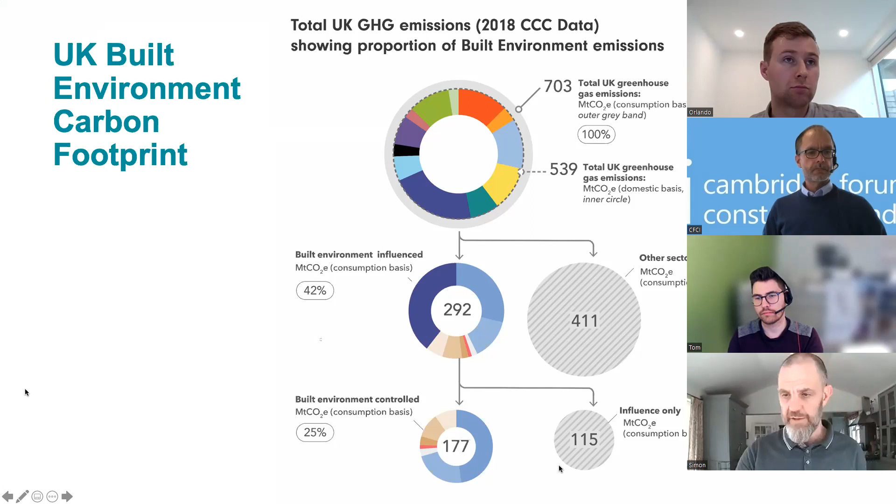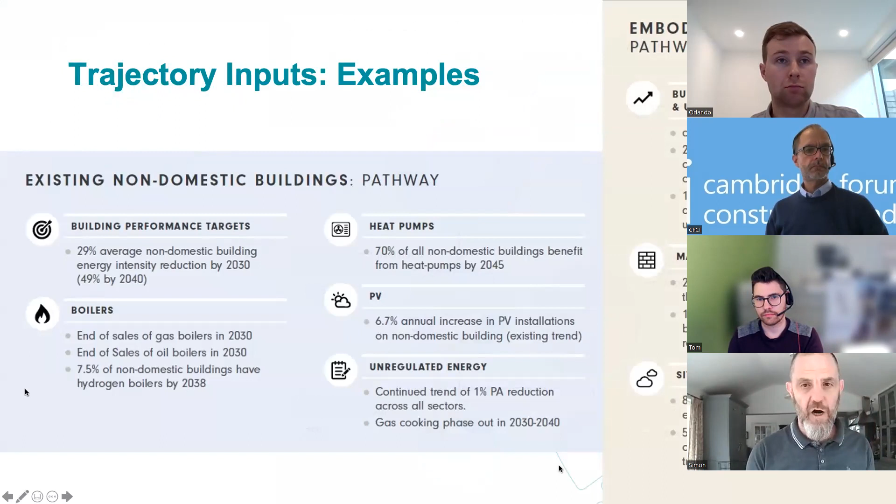So then to determine at that point, what we had was the baseline, the carbon footprint impact of the built environment. And what we were trying to do with the roadmap is say, to get to net zero 2050, we need to make massive shifts across all of our primary areas. So we broke things down into existing housing, existing commercial buildings, new buildings, and infrastructure - those are the four main groupings.

So then to determine the carbon budgets, once we had that carbon footprint and scope of emissions, we were able to say, what are the things that need to be done to get us there? So for instance, if you look at existing non-domestic buildings, 70% of them have to have heat pumps by 2045. We have to end the sale of gas boilers and oil boilers by 2030. 7.5% of non-domestic buildings have to have hydrogen boilers in the late 2030s.

Now, the reason these are all significant for us is, getting this clarity at a really granular level for each different building type means when government puts regulation out to consultation at the minute, I can cross-compare that to what the roadmap shows, and we can indicate whether we think it's going far enough, fast enough. It gives us an understanding of how quickly skills and supply chains across the market need to get into play to get us to the right places.

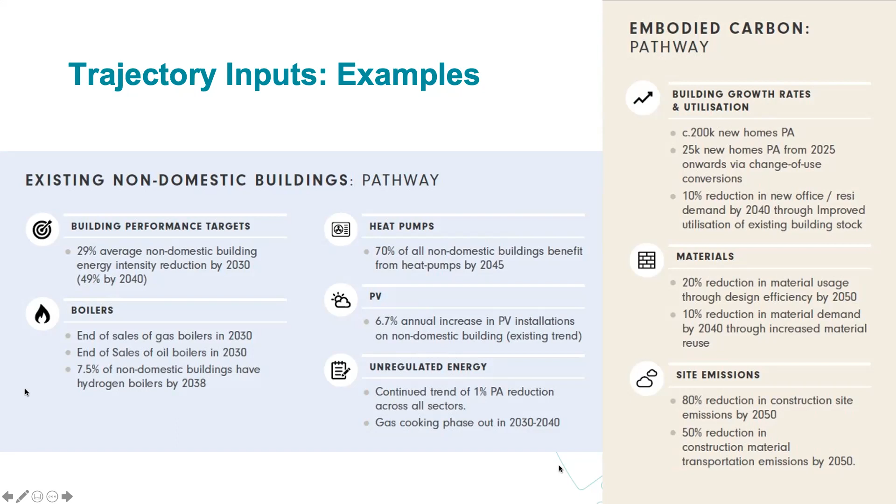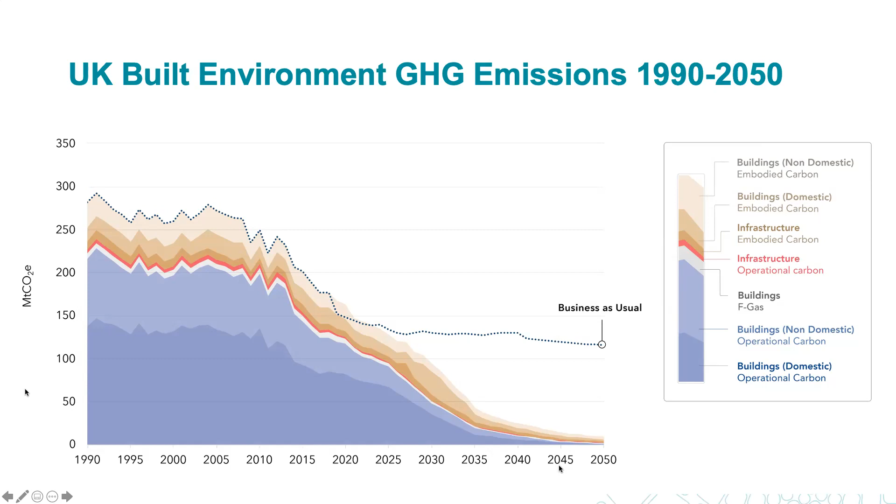And what I'm going to do next is go into the 5 key recommendation areas and just highlight a few different bits of detail as to what needs to be done on this. But again, in the report, we've tried to be really precise about indicating exactly what has to happen and when across each area. So we've got loads of information in there about what are the key milestones, what are the key policy interventions needed and when.

It's been a tumultuous but very positive six months engaging right across UK government and all the major departments with the roadmap, understanding and talking to them about what that means—from BEIS and DLUHC before and after Christmas, right through to Treasury last week, along with all the officials and a wide range of energy providers in that meeting.

So onto the 5 key priorities. At a summary level, we have an incoherent approach to how we're going to decarbonize the existing housing stock—that's the big chunky blue area at the bottom of the roadmap graphic. On non-domestic buildings, we're miles off understanding the performance of those buildings, so we need baby steps around enhancing the amount of energy performance that has to be visible, disclosed and reported. And for new buildings, one key output is moving away from designing based on a notional energy approach rather than designing for actual energy use.

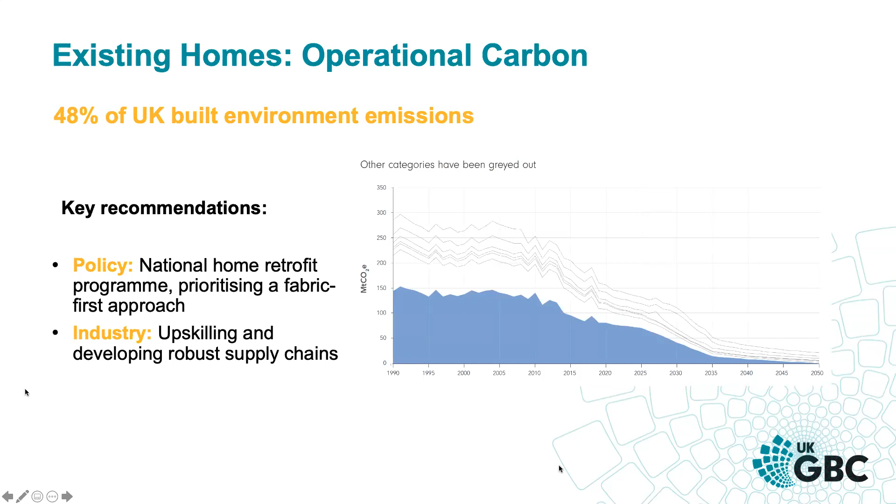Just to reflect quickly, that dark blue area highlighted shows the trajectory needed from the national retrofit of homes. It's pretty robust that ceasing the sale of gas boilers and that massive uptick in installation of heat pumps—there's a moment in time around 2030 that if we don't get right, we then can't hit the 2050 targets, whatever is done everywhere else. So there are some really big seismic opportunities and risks in here.

In terms of non-domestic buildings, what we need is for everything from the valuation to the use of non-domestic buildings to reflect energy use in that decision-making process—making sure real world performance is visible in the market, that it becomes a factor in asset valuation, market transactions, and ensuring we're engaging much better with occupiers as well as landlords in that process.

So what we need is a performance-based rating system to come in to help drive that. Again, like housing, we need a cut-off date for existing commercial buildings—after 2030, no more gas. We need to keep ramping up the minimum energy efficiency standards as they apply to existing commercial buildings, and we need to get rid of VAT on energy efficiency retrofit works.

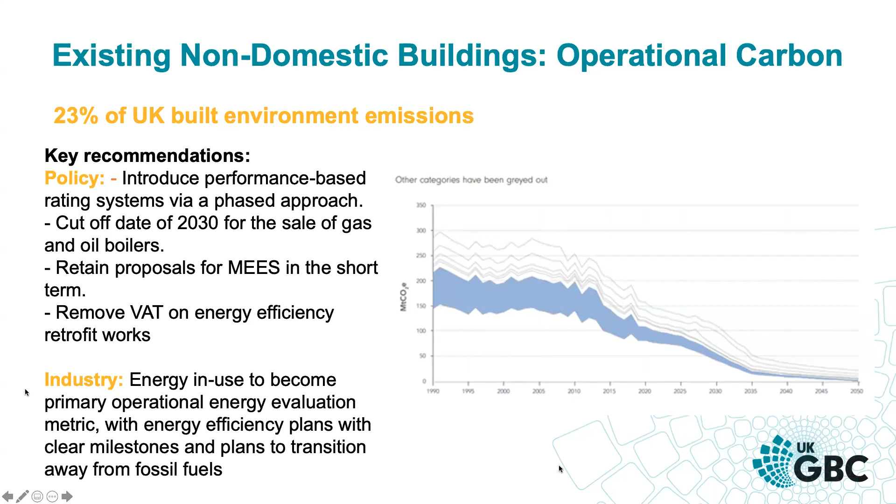That's also one of the policy recommendations in existing housing, as is the requirement to flex stamp duty so that you get variable stamp duty based on the energy performance of a building—so that at point of transaction, we are encouraging people to, A, consider energy performance, and B, address it if that's going to have a financial boon when it comes to calculating stamp duty levels.

Then in terms of new buildings, just a tiny bit more detail. Everyone will be aware that at the moment we use a notional building approach. So our building regs and our EPCs don't really relate to how a particular building is actually performing in terms of the energy it uses.

So we need to move to an actual performance approach to energy use and set a really clear and coherent timeline for industry so they can skill up and scale up to get ready for the higher performance standards that are coming. We've got the future homes standard and future buildings standard interim targets this year, and then we're looking at setting what the standards will be for 2025 onwards. There's a real moment in time here to show the net zero ambition that's going to be necessary, and make sure we're doing that on an actual energy use basis.

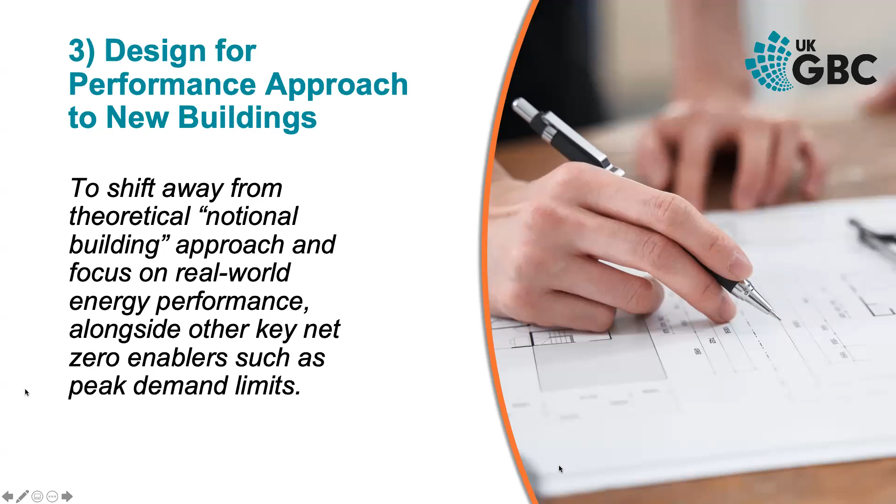There's a real life cycle issue around how we embed that actual energy use into the process. It can't just be something that happens at the design stage or construction stage on a technical basis. It has to be right back at the start when we're thinking about contracting and procurement, and at the back end when we're thinking about management - what is the actual energy performance of that building? Part of that is about technology and design, and part of that is about knowledge transfer and efficient management, and an understanding of energy behaviour across a much wider group of professionals across the industry.

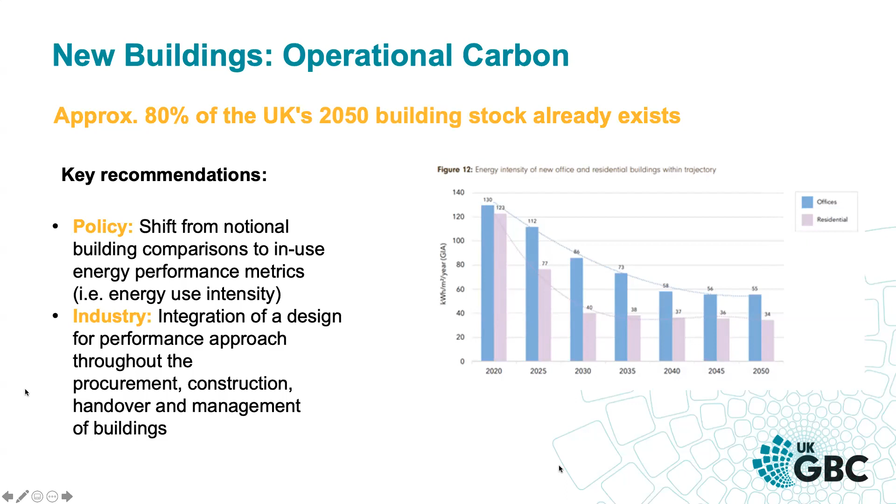In terms of embodied carbon, it currently makes up 20% of built environment emissions. The trajectory shows that as we improve the operational performance of buildings, the relative size of the impact of embodied carbon increases as operational emissions go down. 2035 is the tipping point when operational emissions have fallen to the extent that embodied carbon emissions become the bigger of the two. But at the minute, embodied carbon is currently completely unregulated.

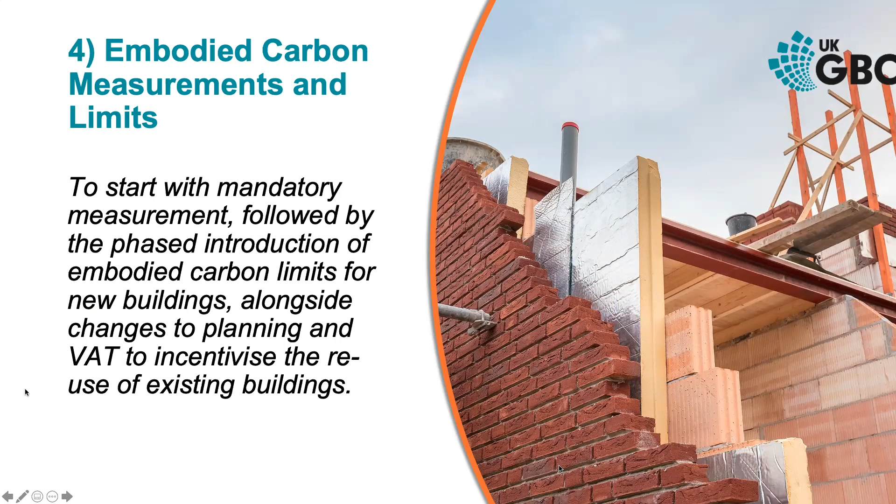Measurement of embodied carbon, and mitigation of the amount of embodied carbon, is entirely voluntary within the construction sector. So the roadmap is calling for legislation to be introduced quickly, initially requiring just the measurement of whole life carbon on projects over a certain size. That's to try and be realistic and recognise where the industry's at in terms of an agreed benchmark and an understanding of different product standards. Then after that initial measurement, we're looking at following up with the introduction of embodied carbon limits on a ratcheting basis.

I won't dwell on the detail here, but we've spent several decades working through different approaches and policies and industry movements to address operational carbon. It's time that we take that same level of strategic thinking to the embodied carbon problem.

We are seeing certain signs of embodied carbon rising up the agenda, with the November refusal of the Tulip development project in London - the Foster-designed tower - where embodied carbon was given as one of the two reasons for its rejection. And there's the percolating issue of the M&S building in London at the moment as well, with embodied carbon sitting as a big concern within that.

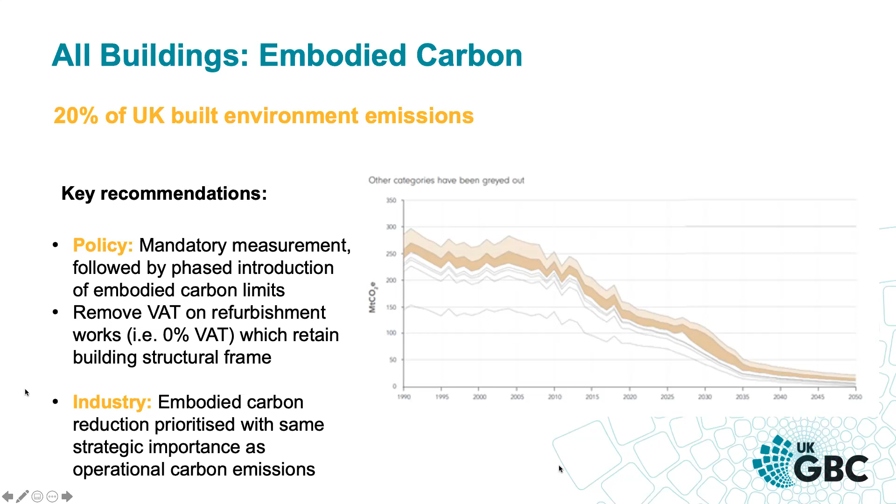It's worth saying a word on embodied carbon. I won't dwell on the detail, but for anyone interested, when I send the information and links, we've analysed and set out when we think regulation - A, of measuring embodied carbon, and B, of reducing the amount of allowable embodied carbon - should come in for different building types. That's partly because bigger buildings built by bigger companies can seed the knowledge quicker into their activities.

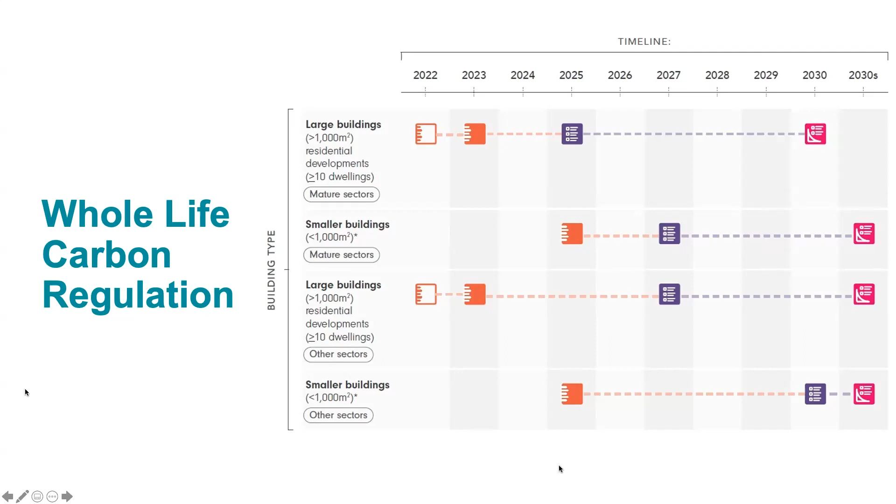The smaller buildings are much more challenging to get this new layer of knowledge into. At a basic level, the orange outline at the front end is mandatory measurement communicated that it's going to happen. The solid orange boxes are when mandatory measurement of embodied carbon and disclosure comes into force. The purple boxes show when minimum standards begin to kick in, where the trajectory of ratcheting begins, and the pink is the progressive tightening that happens after that. So when we look at government policy proposals or consultations, we can see how they perform against what we've got there.

I've kept infrastructure light on this, but even more so - we moan a lot that government don't have a coherent plan for housing retrofit, and we don't have an agreed strategy around how to address the decarbonisation of our existing commercial stock. But actually, maybe more than anything, what we need for a net zero infrastructure approach is real systems thinking.

When we're looking at the scale of the projects and their sizes, that balance between performance, a whole wider range of societal impacts, embodied carbon, integration with surface transport, integration with the energy infrastructure - we really just need a complete shift in mindset when it comes to infrastructure if we're going to reduce those emissions.

What we can't get to is zero in this area, because of supply chain issues around the embodied carbon impact. So it's one of the areas where at the very back end of 2050, there's a small residual amount of built environment emissions that we will probably still need to offset, through a combination of land use change and some sort of greenhouse gas capture technologies. For anyone familiar with the regulatory approaches, these will probably need to be implemented across all projects as one of the many steps to take on this.

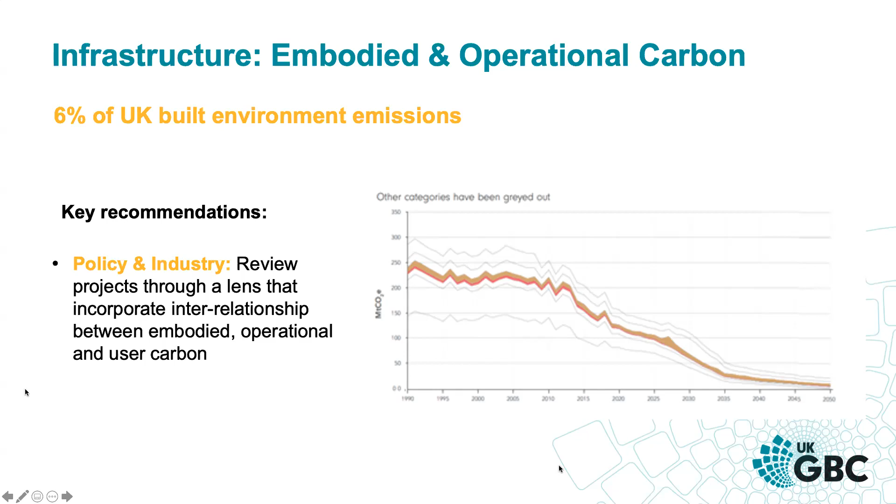In terms of where next for UKGBC - we've got a massive programme of engagement, both in Whitehall, up in Scotland, and with various combined and local authorities around the roadmap and what it means. In fact, we're in discussion up in Scotland about whether we do a Scottish-specific one, because they've got a 2045 target, and there's a keenness for us to remodel for that.

What we will be doing with Arup and other partners is looking at rolling updates for the underlying data, and then slightly longer range rolling updates about progress against that. So making sure we can always understand where the baseline is on a yearly or two-yearly basis. Then maybe on a three-yearly basis we can cast forward and say which policies have come into play, what industry actions have been taken, and how that recalibrates what we need to do moving forward.

I think I've overrun by a couple of minutes, so apologies for that, but that's me.

Great. So why embodied carbon? What is embodied carbon, and how can we address it?

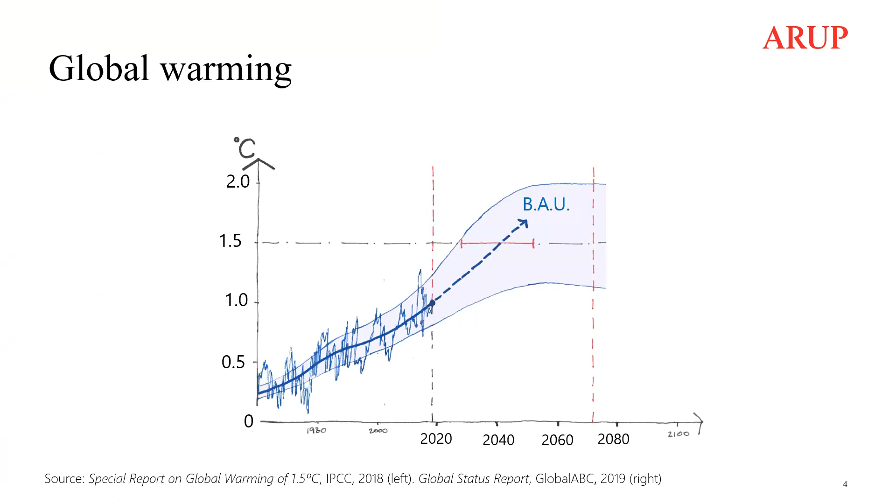I'm sure lots of you in the room know, but if we keep going on as business as usual, we will surpass 1.5 degrees in around the 2040s, according to the latest IPCC report. The consequences of doing that are pretty horrendous. If we go anywhere above 1.5 to 2 degrees C warming, it has huge consequences for life on the planet, both ecosystems and human communities.

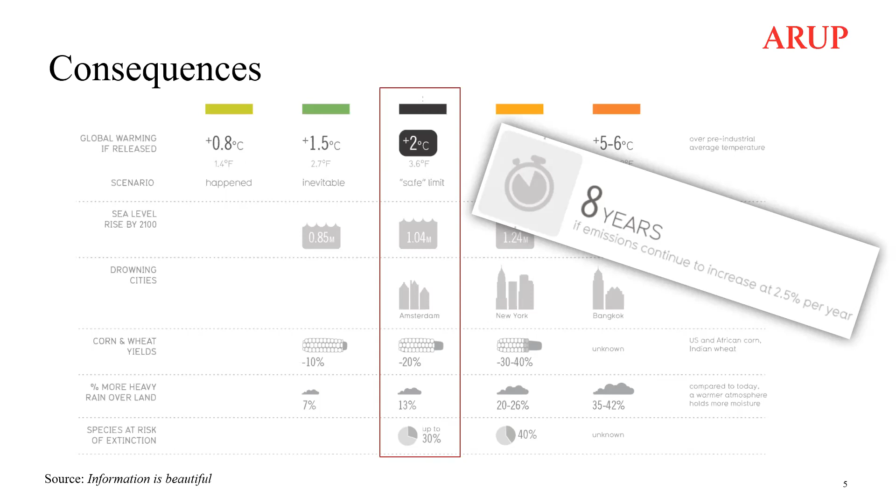This is just a graphic that I love from Information is Beautiful. I think it really hammers home the point of just how widespread the impacts of surpassing these targets are.

In terms of global emissions, I think Simon already said the UK values, but globally, embodied carbon of construction materials accounts for 10% of global emissions. That's more than aviation and shipping combined. So we have a huge impact.

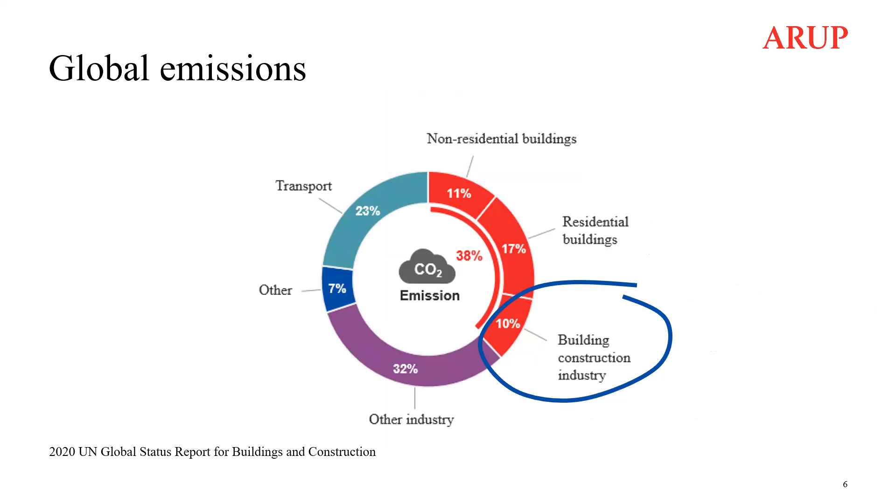We know that we need to minimize emissions, and to do that, rapid, far-reaching and unprecedented changes are required. So we have a lot of work to do on embodied carbon, which until very recently has not been discussed nearly enough.

Just to give you a quick idea of how much impact you can have as a built environment professional on global emissions through your professional work compared to your personal lives - we often think of reducing the amount that we're flying, going vegan, or cutting down on our car driving. That's fantastic stuff, and we all need to do that. But we also have the privilege of a huge opportunity to make even bigger, two orders of magnitude larger carbon reductions through our work.

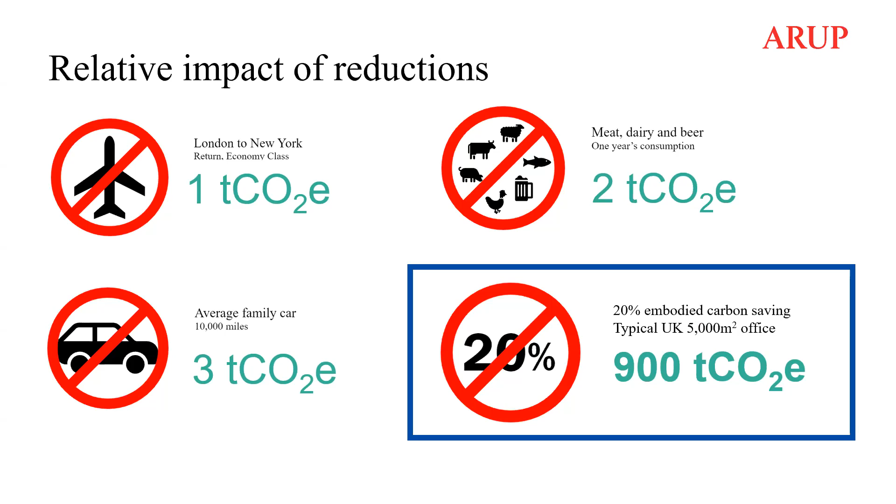In this example, if we just reduce the embodied carbon of a typical office by 20%, we can save 900 tons of CO2.

Thankfully, the industry is moving forward. There are signs, and I've just picked out one particular lever for change, which is policy, because I think it's a particularly important one. Of course, every single stakeholder in the built environment needs to act, and the UKGBC roadmap has really clear guidelines for what each stakeholder group should do.

But my sense, at least, is that lots of people, especially in the design community where I'm from, have lots of willingness to make change. And I think once the policy lock is taken off, then the industry could really accelerate towards net zero.

So just an example, in London, we have the London Plan, and as of last year or maybe the year before, there is a policy that requires a carbon assessment at the pre-planning stage and also at the post-completion stage, so that design teams are forced to actually think about how they're going to reduce carbon and what they're going to do, which is fantastic.

Again, Simon mentioned policy in the UK, and I'm really pleased that fantastic people like Will Arnold at the IStructE, Tim den Dekker, Julie Godefroy, and others have come together and pitched this Part Z new carbon regulation to the UK government, which would require carbon assessments in all projects, and then after it's been in place for a few years and data has been collected, it would set carbon targets to be adhered to. So that is really promising - I very much hope that goes through Parliament really quickly.

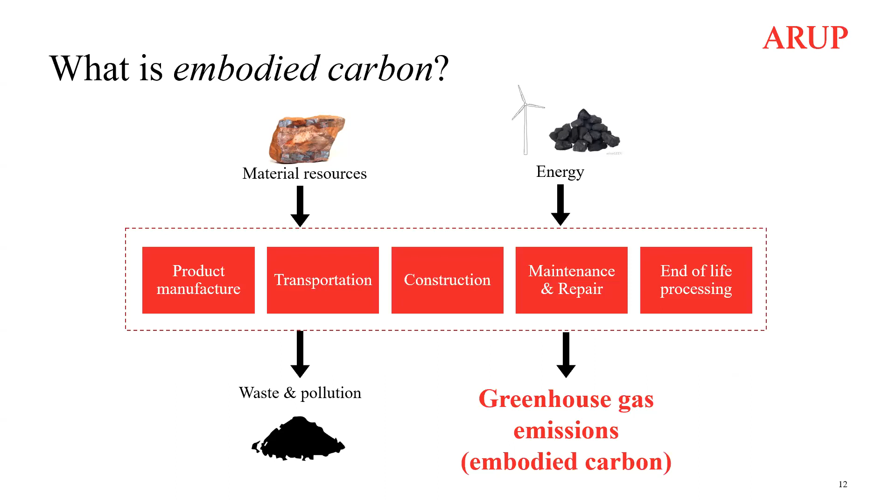So what is embodied carbon? Taking a step back, over the life cycle of a project, we manufacture products, transport them, construct them, maintain and repair them during the life cycle of a building or asset, and then they're processed at their end of life. Into that goes a whole load of materials and energy, and out comes waste, pollution and greenhouse gas emissions. That's what we refer to as embodied carbon.

This is a diagram of the life cycle, showing the life cycle stages of a building. If you're not familiar with it already, I really recommend you familiarize yourself with these modules from A to D, because that's how whole life carbon is referred to in practice. Everything in pink is embodied carbon, so we have the manufacturing, construction, in use and end of life stages. The yellow is operational carbon, and on the right-hand side we have this circular economy module, which allows you to quantify the benefits or loads of using those materials from your building in a certain way after their end of life. Embodied and operational together make whole life carbon.

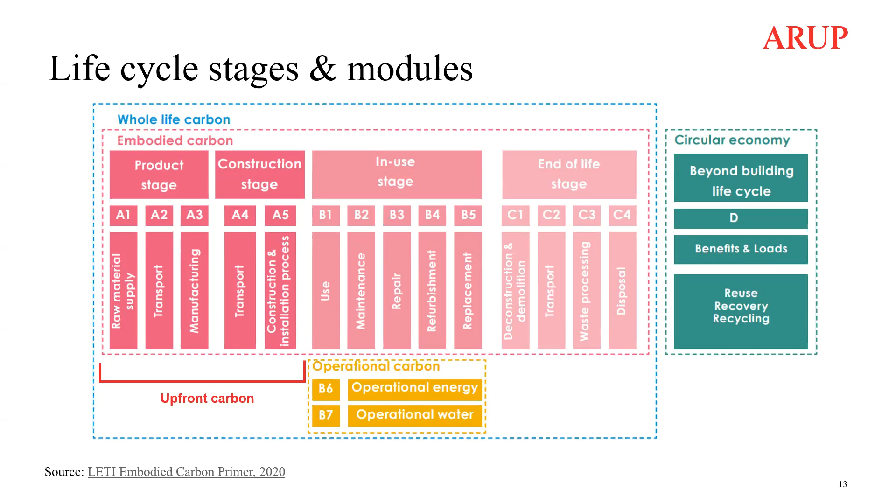It's useful to have an understanding of how operational and embodied carbon share the whole life carbon total value. This is an in-depth study of six Arup buildings that some of my colleagues did. The blue, dark blue and green parts of the pie chart are embodied carbon, and the grey parts are operational carbon. This gives you an idea of how much the split between them can vary from project to project. It really depends on the context the project is in, and any project constraints beyond carbon targets. On average, it's around 50-50 at the moment.

So embodied carbon is definitely just as important. The really critical bit is the green bit, the A1 to A5 embodied carbon, those are the life cycle modules where emissions are released by the time the project is completed. So they're released first. You can see how much of a big chunk of the whole life carbon the green bit is. So it's really critical that we reduce that now as soon as possible, so that we can reduce emissions today.

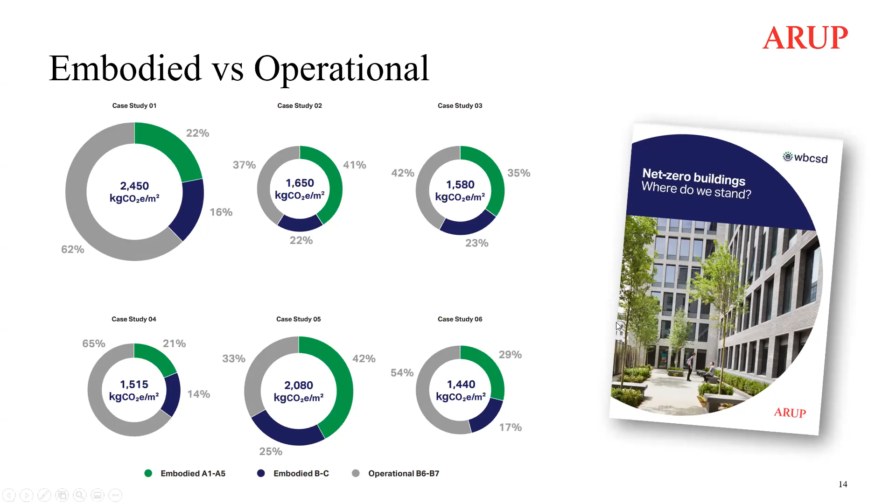We talk a lot about embodied carbon, but to hammer home the point, it's really important to consider both operational and embodied carbon, especially when you're considering a refurbishment project, for example, to understand the balance between the two for different schemes you might be looking at.

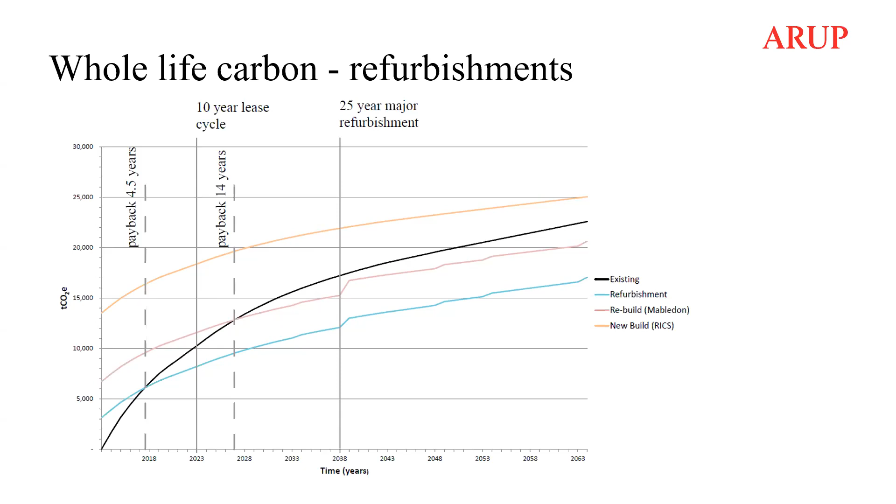This graph shows a particular study some of my colleagues did a while back, that looks at the carbon payback time for the capital investment of carbon from the materials put into a refurbishment, a rebuild, and a new build scheme, against the black line. The black line is the existing building carbon emissions, and you can see the blue and pink lines showing the various refurbishment levels and how long it would take to pay back that carbon emissions. So it's really important to do this kind of holistic thinking, so that we can choose the best option.

Calculating embodied carbon is very simple. If you haven't done it already, you take a quantity, multiply it by a carbon factor, and do that for every product in your building, for every life cycle stage. You add it up and you get your building project's embodied carbon. However, selecting your carbon factor, I will admit, can be complex. It requires a bit of judgment and also robust data, so that bit can be tricky.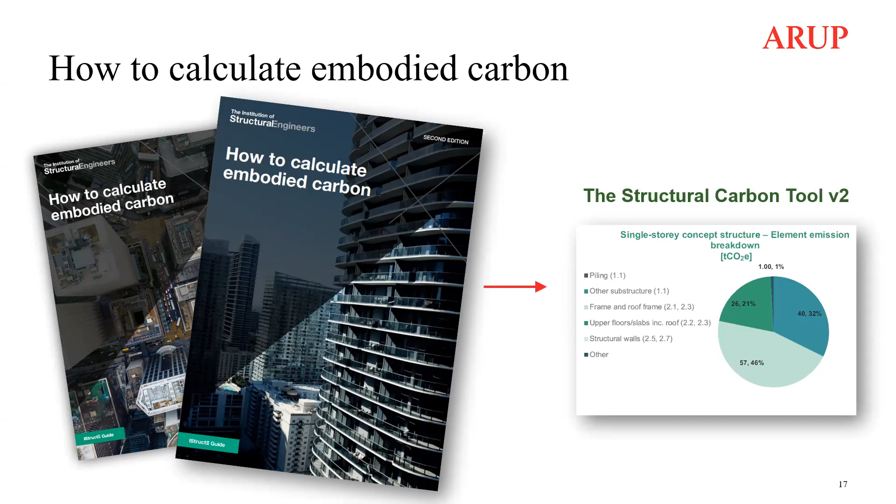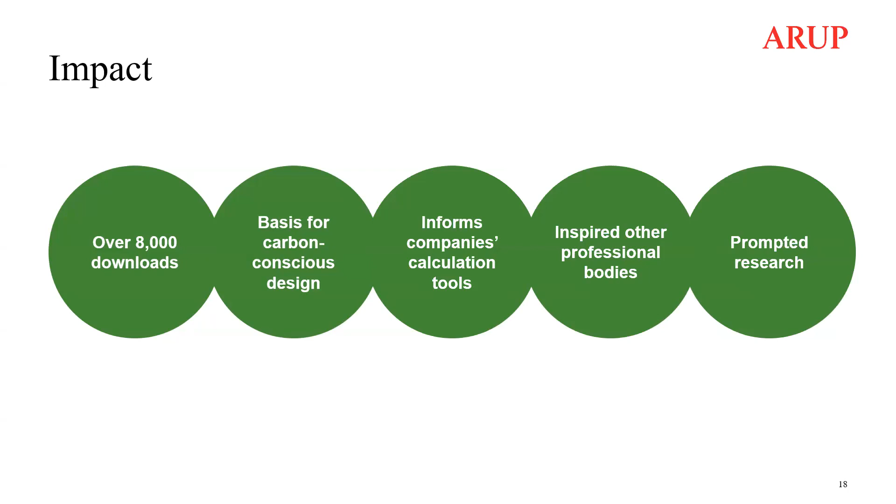And those documents had a really positive impact so far, they've been downloaded thousands of times. They're being used as a basis for carbon calculation by loads of companies now. Other professional bodies are looking to do a similar thing, and it's prompted further research into embodied carbon, which is fantastic.

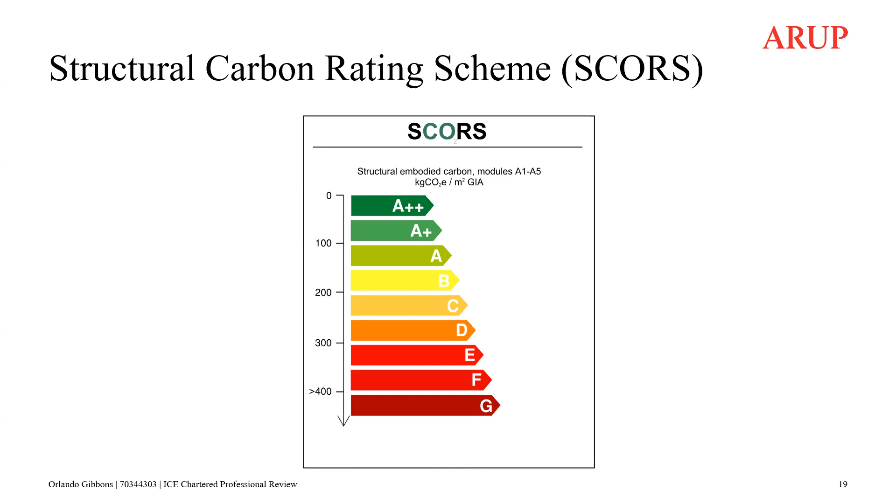Another thing that came out of the guidance on embodied carbon that I co-authored was the need for really understanding what good and bad looks like in terms of embodied carbon. So this was a rating scheme that a few of us who do a lot of work with the IStructE came up with, which is basically like a fridge sticker for embodied carbon. It's really useful, gives you a way to contextualize how good or bad the embodied carbon of your building is.

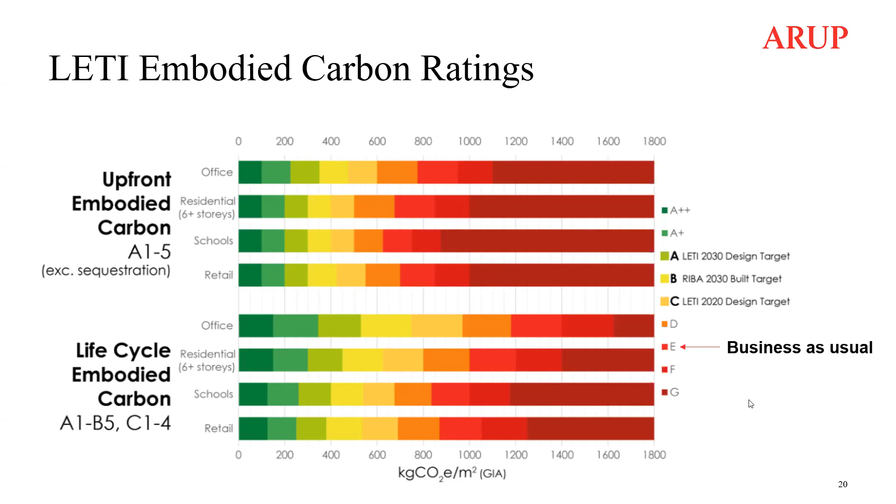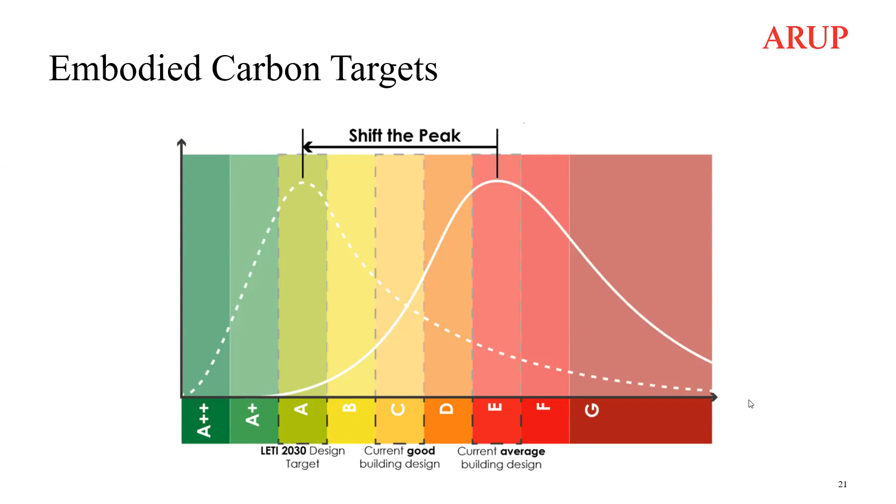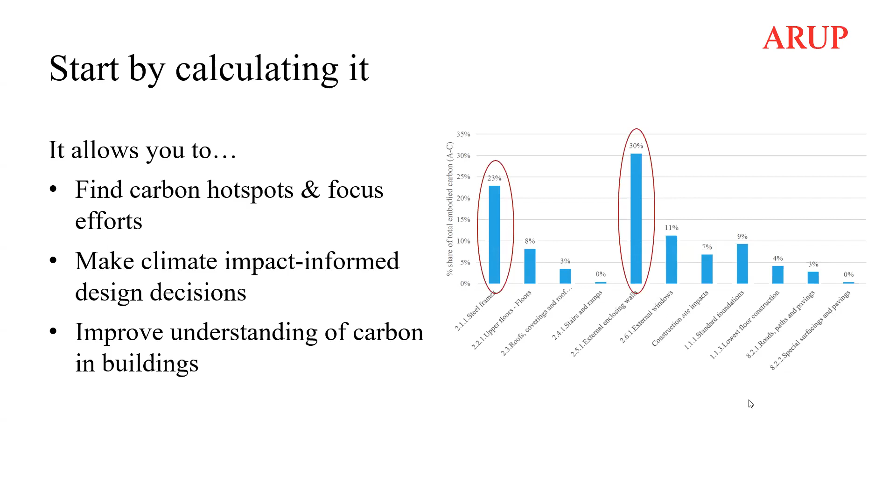So how can we minimize embodied carbon? Well, we need to start by calculating it. Understanding the numbers is extremely powerful to inform design decisions, but also just understanding the carbon emissions in your building allows you to find hotspots so you can focus your efforts on reducing it, and then make climate impact informed design decisions. It improves not just your project team's, but the whole industry's understanding of embodied carbon in buildings - so it's really, really critical.

We should calculate it whenever there is a significant design decision to make, so that it can be integrated into the decision-making process. But we should also calculate it at the end of each design stage so we can track progress across a project and post-completion, because we need to know exactly what the embodied carbon of our buildings actually is, rather than just what we think it would be based on our assumptions during design.

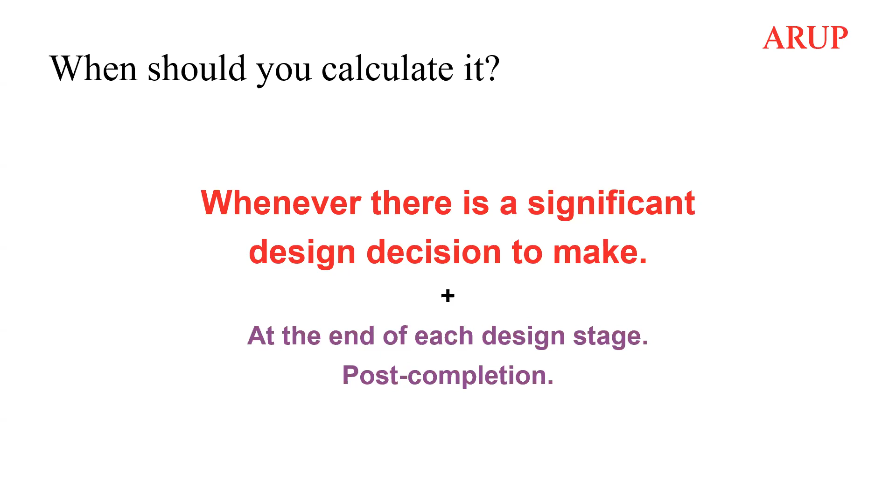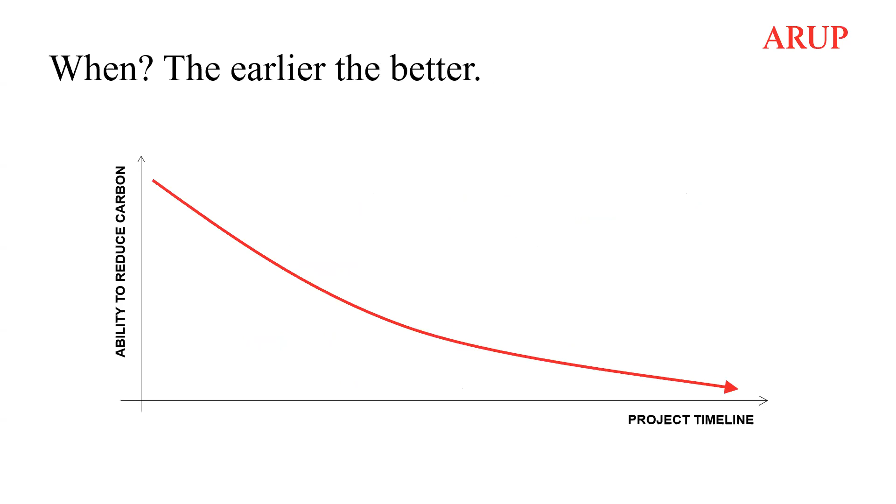And we need to do it - the earlier the better. These are simple diagrams to show that our ability to reduce carbon decreases over a project timeline as decisions get baked in. At Arup, we're taking this really seriously. Starting this month, we're going to be calculating whole life carbon on all of our projects around the world, not just in the UK. It's a really big undertaking, but really, really exciting, and I hope other companies follow suit.

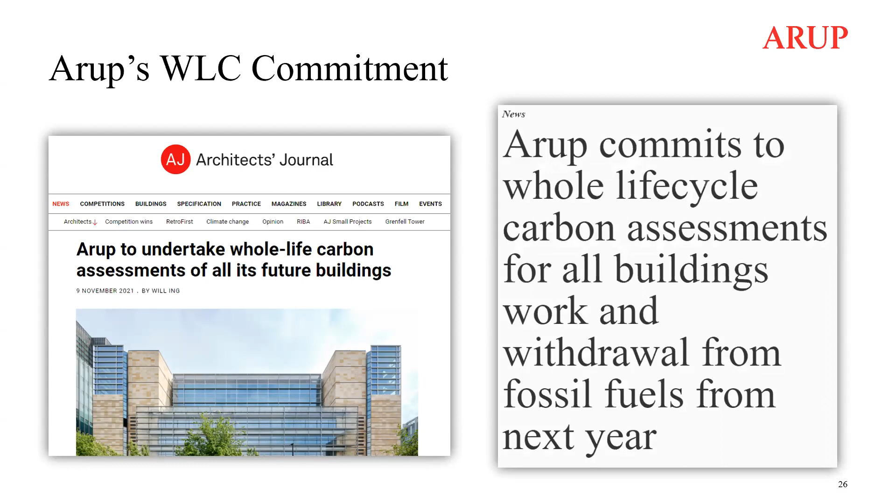Because we're short on time, I'm just going to skip through some of the details on things you can do. But I would say, in terms of minimizing carbon, it's really important to have really strong client and collaborator communication. There's technical expertise needed, but there's also a lot of collaboration work needed to really realize the significant changes that we need in our projects. We need to be advocating for reductions within our teams, and we need to be transparent about the assumptions we're making and how we've calculated things.

Don't let uncertainty deter you. There's still quite a lot of progress to be made in terms of the data availability for materials.

We need to coordinate with the design team so that we're making sure that our embodied carbon reductions, say as a structural engineer, don't adversely impact those of the facade engineer or architect. And we need to be clear with our clients that the guidance and data is developing on this topic. If I start a project now, in 5 years' time, I might think that different assumptions are better for my building. So it's really important to make sure that everyone is aware that embodied carbon is still in its infancy.

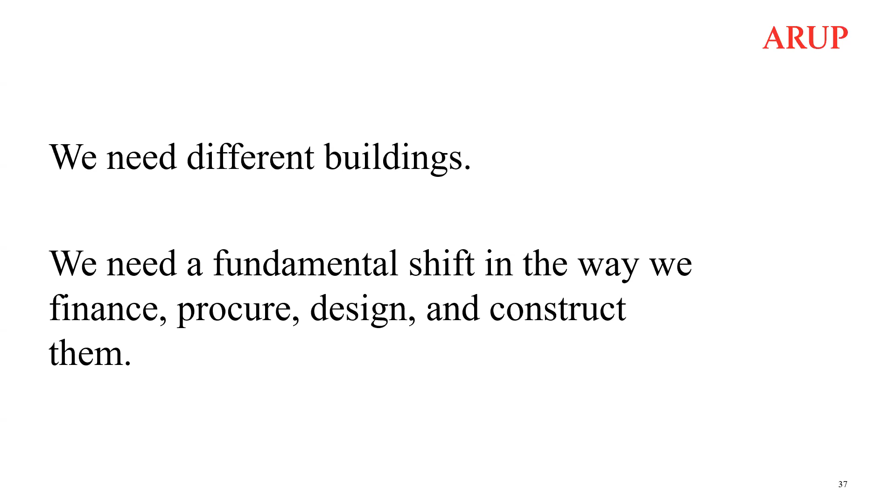So I'll just finish by saying that we need different buildings. We can't continue designing as we are and just hope for a silver bullet to come along. We need radical change. We need to minimize the amount of materials that we use, and it needs to happen all the way through the supply chain of projects. Thanks very much.